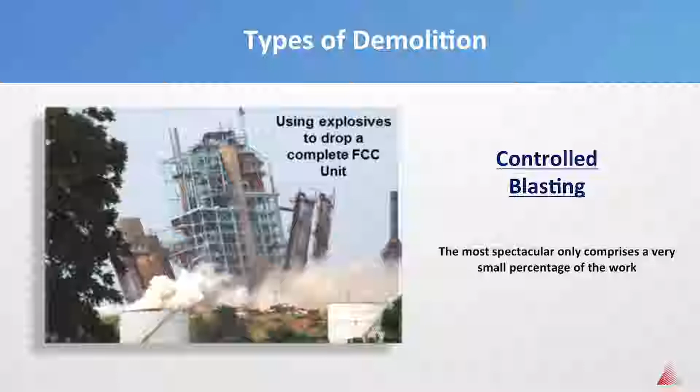Now this is one of the types of demolition: controlled blasting. It only comprises a small percentage of the actual type of demolition work, but it's also very, very safe to do if you do it correctly. Sometimes controlled blasting is the best route to go, but it only takes up a very small percentage of the actual content of demolition projects.

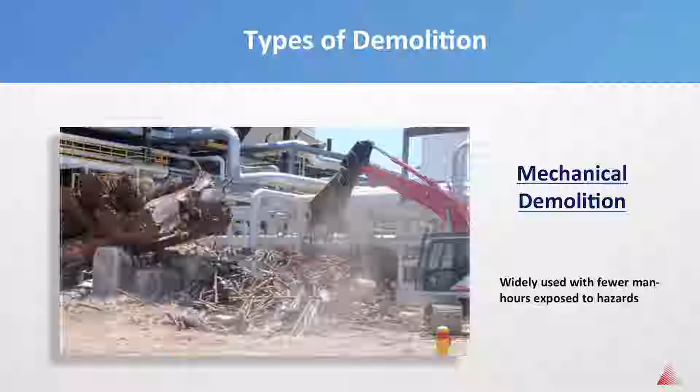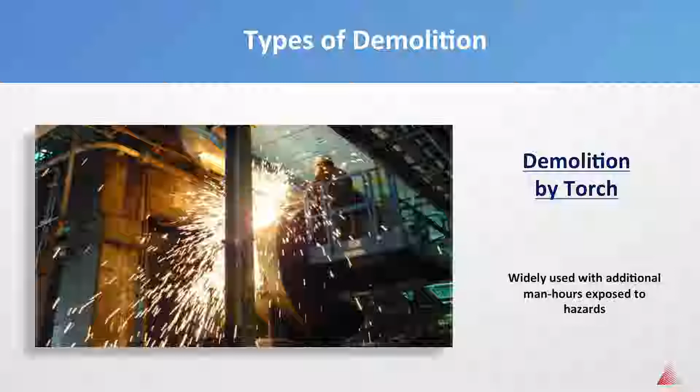Then you have mechanical demolition, which is widely used and has fewer man-hours exposed to the hazards. While shears and processors and things of that nature are the best things since pockets on a shirt, they can't replace the cutting torch as the staple of the demolition industry. Experienced demolition burners, or demolition techs, high burners—they call them by a multitude of different names—use terms like set cut, drop cut, fish mouth, hinge cuts. They use terms that can make a 3,000-ton structure come apart like an erector set. It takes a long time to train demolition burners, and a lot of experience, but they're worth their weight in gold when you have good ones.

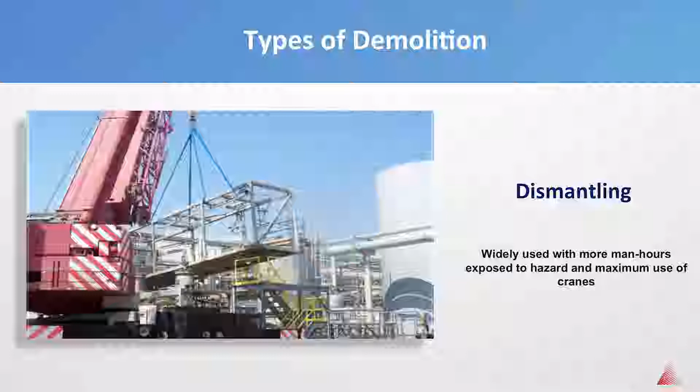Then you have dismantling, which is basically taking things apart with cranes. You either downsize them using saws, unbolt them, use cutting torches, or whatever it takes to break it apart into manageable sections that you can lift down with cranes. That's called dismantling. It has more man-hours exposed to the hazards, and a well-thought-out lift plan is extremely important. There's specific criteria you have to be concerned about in regards to making crane lifts on demolition projects, and we'll go over that a bit more later.

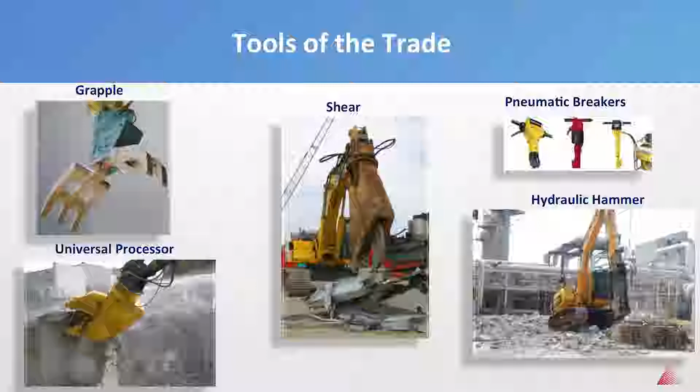One thing you notice is that on the cabs, there's a cage around the cab to protect the operators. That's really important. If anybody ever shows up with a piece of demolition equipment that does not have a cage to protect that operator, stop them—don't let them work. Because while these machines make taking apart a multi-thousand-ton structure look like short work with no problem whatsoever, all it takes is just one piece of concrete or steel the size of your fist to kill somebody.

Now you get people that talk about being scared to death to be shot at—a bullet's that big. But if you take a shear and cut into something, and a bolt the size of my hand pops out and flies 40 feet, that's going to do more damage than any bullet possibly could. So give these operators a wide berth.

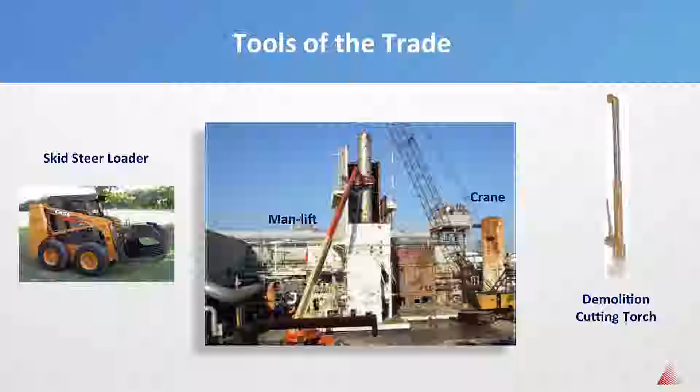Here's some of the other tools: a skid steer loader, a man lift, a crane, and a demolition cutting torch. Skid steers are the handiest things on demolition projects, and whenever I'm reviewing a demolition bid and the contractor doesn't have skid steer loaders on there, something's wrong with it. You need those—they have all kinds of attachments, and they're very versatile and handy to use on different projects.

Then there's a 3-foot cutting torch. If you have a contractor show up with a little 1-foot shop torch and start cutting, have pause and back off, and have them back off. The 3-foot torch or longer is an engineering control as well as a safety mechanism—number one, it allows the burner, the torch cutter, to stay out of the fumes.

We're all concerned about lead-based paint fumes. Any scrap guys or scrap dealers out here? Yeah, we got several out here. They'll be able to tell you that those fumes don't just have lead-based paint in them—they've got all the other metals that make up that steel.

They've got chrome, manganese, zinc, and everything else. So you need to make sure you keep your head out of the fumes and always wear a respirator, and have medical surveillance if you've got somebody using a torch.

Also, the 3-foot torches are longer. So many torches are 6 and 7 feet long. It allows you to keep away from the hazard in case something pops.

Demolition versus construction: if you can't measure it, then you can't manage it. You really need to make sure you can measure it, but make sure you're using an effective measurement tool.

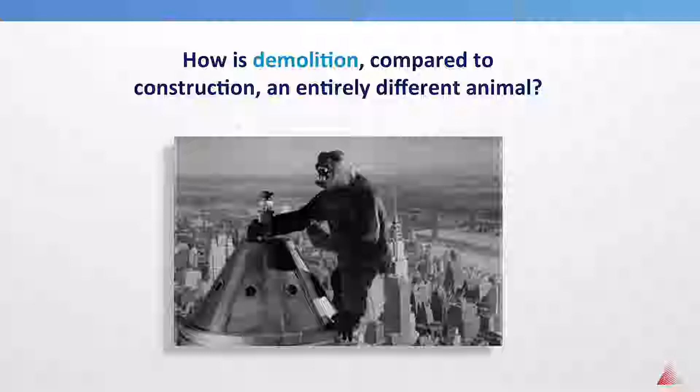So many owners and also many agencies use construction metrics to gauge demolition projects and contractors, and that doesn't necessarily work, because there's a major difference and it's an entirely different animal than construction.

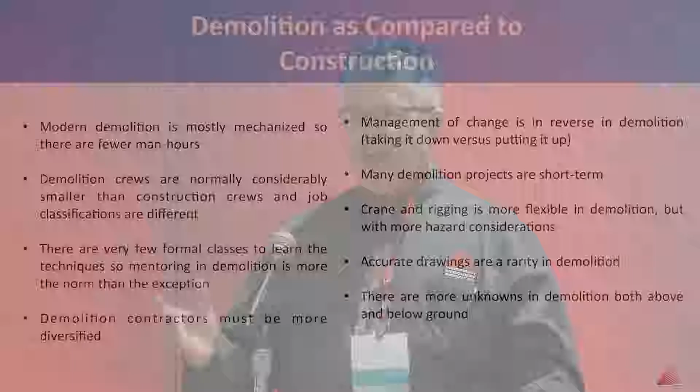Modern demolition crews are mostly mechanized, so there's fewer man-hours exposed to the hazards. Also, the demolition crews are smaller, and you're dealing with more hazards, because you don't have as many man-hours to dilute the total recordable incident rate and your experience modification rate and the other formulas you're concerned with. One recordable incident will blow you completely out of the water if you're being compared to construction standards.

So it's very important that you use an effective measurement tool when gauging the effectiveness, capabilities, and competence of a demolition contractor. There are few formal classes to learn demolition work, and mentoring becomes a way of life and more the norm than the exception.

Demolition contractors must be more diversified, and management of change takes on an entirely new meaning, because it's implemented in reverse in a skyline that changes by the hour.

Many demolition contracts and projects are short-term in duration. And accurate drawings are a rarity. I've got an example here where I'll show you that even when drawings are available, chances are they may not be accurate.

Craning and rigging is more flexible in demolition, but it has more hazardous considerations, and I'll go over that a little bit more in a minute. There are more unknowns in demolition, both above ground and below ground, especially in your older facilities.

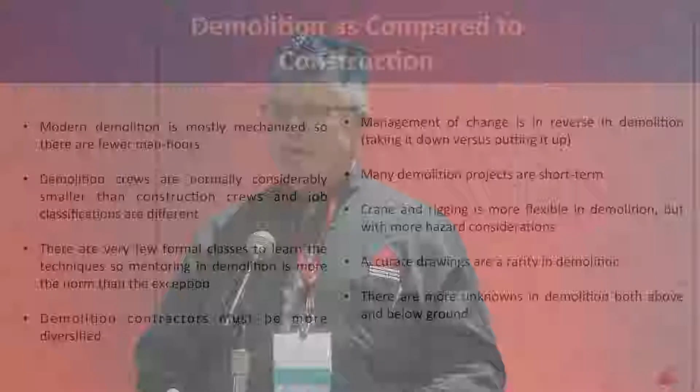Now here's some of the challenges on demolition projects: non-standard rigging. This particular lift right here, we had 2 engineers run weights on it. We were at 60% of the chart of the crane, so we knew we were okay. We went by the drawings, made the cut, tried coming up, and it would not come up. So we double-checked our weights, double-checked, made sure it was cut. It still would not come up.

An old-timer who had been there about 30 or 40 years came up and said about 20 years ago, we opened that column up and installed a water tank on the inside, and that water tank may still be there. He said, I don't know if it's on your drawings or not. So we cut a little coupon in the side, looked inside, and sure enough, there's a water tank. So we went ahead and cut an entire section out, drained the water, and removed that tank so we could complete the lift.

Now, a lot of times on demolition crane lifts, once you have it, it's yours. In this particular case, we felt very, very comfortable that we weren't going to have an incident, because we could set the load back down, but we felt very comfortable with the weights.

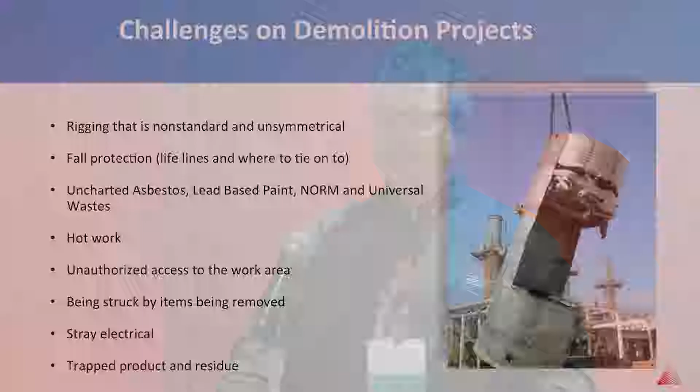Other challenges: fall protection. You're taking everything down, so what are you going to tie off to? That's a good question. Uncharted asbestos, lead-based paint, universal waste. You need to have a competent person on site capable of recognizing the potential for hazardous materials that was missed in the survey.

If you're dealing with asbestos, the requirement to have a competent person on site in accordance with certain standards is required. Hot work: know what to look out for, so you don't blow yourself or the plant up. That's really important. Also, unauthorized access to the work area.

So have barricades, both hard and soft, around the work area, as well as have sign-in and sign-out sheets.

One of the things mentioned in my bio is that I'm a professional safety source approved by the Texas Workers' Compensation Commission in the SIC code of wrecking and demolition. I've had to investigate a lot of accidents, and not all of them were on any of my jobs.

But the worst accident I've ever had on one of my jobs involved a broken back. We had an area barricaded off, and everybody broke for lunch. One of the workers went inside the barricaded area and decided to take a nap. Everybody came back to work, and they didn't know he was in there. This happened in 1986, and the gentleman's name was Pedro Molinas. Somebody dropped a beam across his back, and he's a paraplegic now. He has been for decades.

So things like that, you need to make sure that you have the areas barricaded off and have sign-in and sign-out sheets, and keep control of the work site. One of the things we should have done on that job is make sure we swept the area and made sure there wasn't anybody in there prior to starting work again.

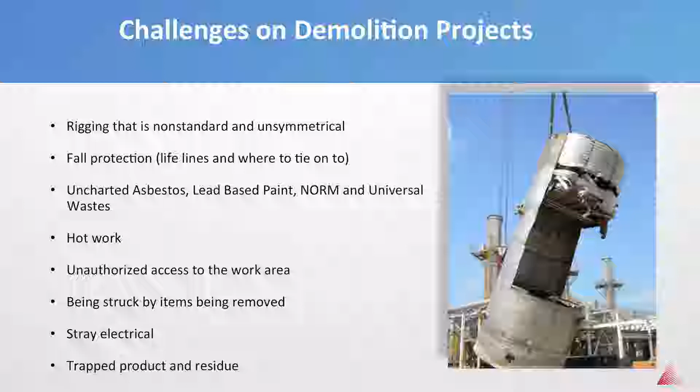Stray electrical - I'll go over it in another slide in just a couple seconds - but one of the things is that the structure may have all the electricity locked out and tagged out, but somebody might have run a stray line off the grid 30 years ago. So anytime you go into a demolition project, treat all electrical as if it's alive until you verify otherwise.

Structural fatigue of walkways and ladders - will they sustain your own weight? I know there was a major accident that killed some people over in the UK involving workers walking on a catwalk, and the catwalk fell. So don't assume that a ladder or a walkway will sustain your weight. Are they safe to tie off to?

If you're up there working on a catwalk, make sure it's safe to tie off to. Will it sustain itself during a lift? One of the things contractors do when making lifts is cut shackle holes in the side of the columns and hook into those. Make sure those shackle holes and the metal in those columns are capable of sustaining themselves when you make that lift, because it's not new construction. But that is a proven method - it's a good way to actually make the lifts, cutting the shackle holes.

Poor training and mentoring of workers - it's important that even certified workers are mentored by experienced demolition personnel. You can have a certified crane operator, NCCCO certified, with absolutely no demolition experience. So just requiring NCCCO certification in cranes doesn't mean they know the nuances and hazards associated with demolition. Make sure you provide a mentoring program to that effect.

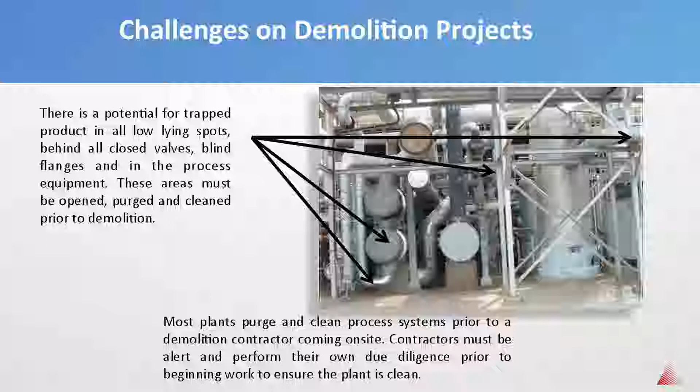Now, another accident, and I'll share a few accidents with you that I've had to investigate. To tell you the truth, I'd much rather prevent an accident than investigate one, just for obvious reasons. But in this particular accident, it involved an oil refinery in Texas. A demolition contractor was taking down a tower that had a big pipe that came down. It was like 100 foot tall.

Workers had been cutting on that pipe all day long without any kind of problems. They were making their very last cut before the end of the day, and there was a valve. That valve was closed. The workers cut on the other side of the valve. Management had changed, things changed. They didn't implement any type of change procedure, and they didn't recognize the fact that hey, that closed valve might mean something. There was trapped product on the other side of the valve. The pipe exploded, killed the torch cutter automatically, and also it just about blew the head off of the man lift, and it seriously injured the other worker. So make sure you verify that something is dead and does not have any type of product or any type of explosive vapors or explosive product in it prior to cutting on it.

Again, stray electrical - always make sure that you verify and verify and verify again. This probably causes more incidents and accidents on demolition projects than fall protection, than people that fall. So this is something you need to verify, that the power is locked out and tagged out, and that somebody did not run an independent line off the grid 30 years ago.

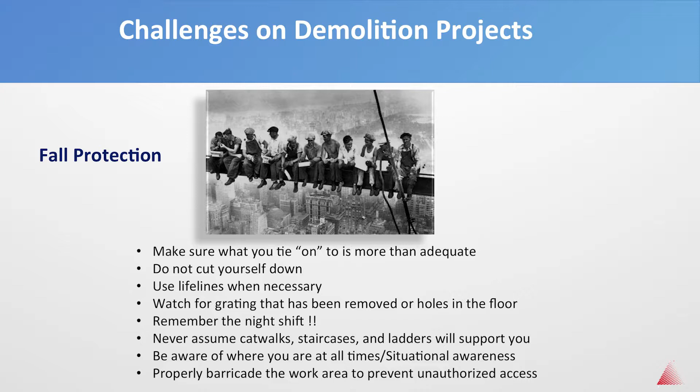Be aware of where you're at all times, situational awareness, and always have an escape route. Here in this room, if the room catches fire, we've got an exit there, and an exit there. If we have an active shooter, hey, we've got an escape route. Everybody start throwing things, or whatever your training is. Anybody on demolition projects, especially on older plants, needs to have an escape route in everything they're doing.

Another accident I had to investigate was about 10 years ago. An excavator operator was in the process of pulling over a structure that weighed 300 tons. He had an excavator with a cable tied off to the structure, and two cutters up inside the structure weakening it, making it ready to pull over. The operator thought the cutters were taking too much time to finish their cuts, so he got out of the excavator and walked up into the structure. When he did, the structure prematurely collapsed, fell on top of him, and crushed him. The two cutters and the foreman had escape routes, so they weren't hurt.

Everything should go as planned, and like Fred said, you design a plan and then you work that plan. But on demolition projects, you've got to really be concerned with the fact that good things on demolition projects, after a while, look like paint drying. But bad things, when they happen, are usually catastrophic, and usually something that's going to make the newspapers. So make sure you do manage change, and make sure you use lessons learned to make sure nobody gets hurt.

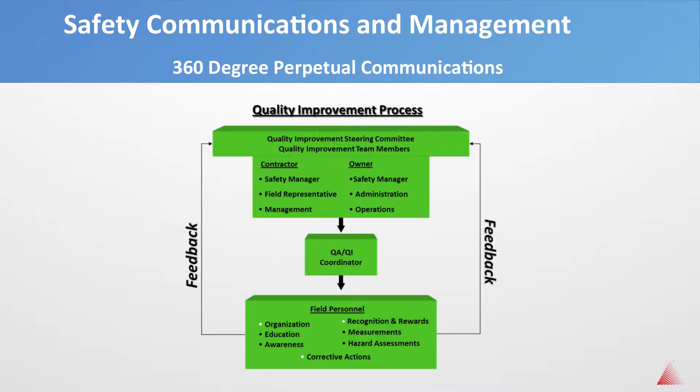What to look for in a quality demolition company. Choosing the right demolition company is very, very important. A lot of this stuff, I think Fred may have already gone over some of it, but I'm going to touch on it from a little bit different flavor, I think.

What do you look for in a top-notch demolition company? One is a great safety record. Make sure that when you look at their safety stats, you verify those stats. A lot of people use IS Networld, PEC reporting, and other companies that pre-qualify contractors, but it's junk in, junk out when it comes to safety. So something as simple as running a web search on a particular contractor before you hire them can help find out if there's anything that didn't show up that should have shown up on their safety stats.

Employee retention: how long have key employees been with the project? Also, do they understand the HSE program, or is it just a fat book on the shelf drawing dust? Financial stability, bonding capacity, experience on similar projects in similar industries, and experience to effectively use investment recovery to help offset costs.

Now, a lot of companies have a playbook. They let the demolition contractor tell them how much value is out there, what it's going to cost to remove it, and what your net cost is going to be. I've got another slide on this I'll go over in just a second, but that equates to asking somebody to hold your wallet without knowing how much money you had in it to begin with. You really need to have a good handle on the value of what you have on your demolition project prior to going out for bids. If you don't, then you're basically at the mercy of the contractors.

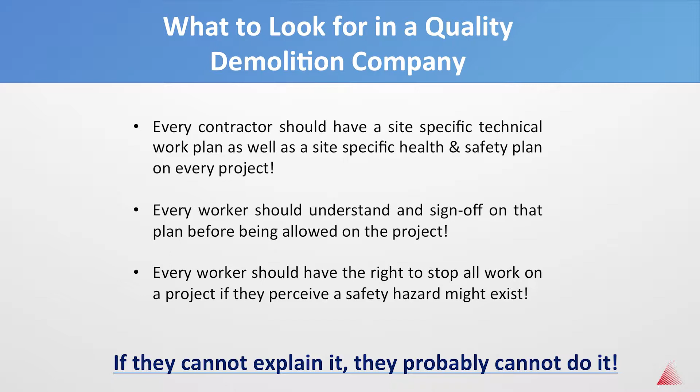Every worker should have the right to stop work in the event a perceived safety hazard exists. And remember, it's all about the people. You could have a great demolition company that's great on paper, but they could have a sorry crew. You could have a mediocre demolition company that has a great crew. So learn to evaluate the entire package, not just the contractor itself, but the crew they're going to put on your project.

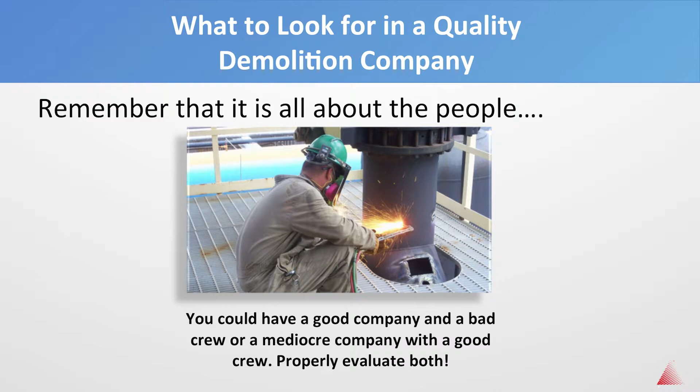A site-specific plan should be concise and linked and tied into a master plan. Now, the corporate health and safety manual is great, but there's no way you're going to implement a 600-page plan on a demolition project. So you need to be concise and be more concerned about getting the message across. You can reference it back to the health and safety manual, but you need to be concise. A 30 to 40-page plan should be sufficient in making sure that you get the point across to the workers actually doing the work. Be in addition to the corporate safety manual, and be flexible.

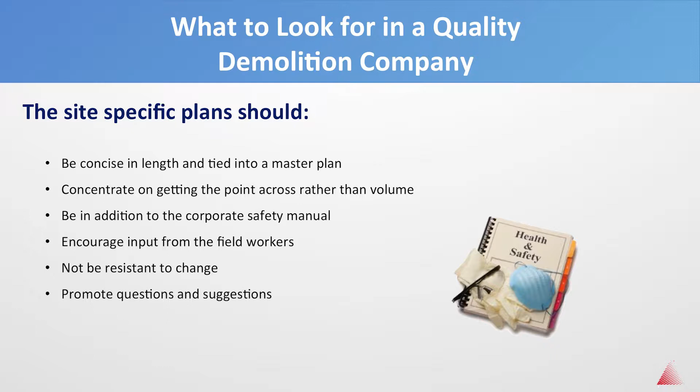One of the things I see a lot of folks do is put together the plan, but then they just bring the crew in and don't get input from them. So be flexible and promote input from the crews, and don't make that plan resistant to change.

The plan should be relevant and effective, including behavioral-based safety observation and stop work components. It should educate every worker on the entire scope of the project, not just their small part, as I mentioned a while ago. Explain the hazards and mitigation measures prior to the worker being exposed to the hazards. That's important.

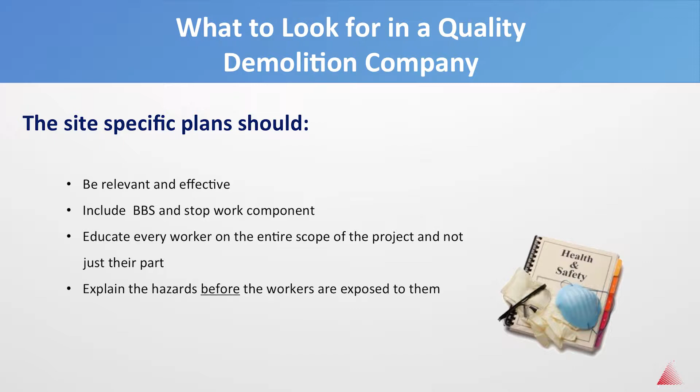So these are some of the elements of a technical work plan, and a resource-loaded schedule, which Fred talked about a while ago. There are ways that you can evaluate a schedule and basically help prevent change orders or recognize potential change orders. Key contact personnel, including after-hour contact information, average crew size, hospital, landfill, and scrapyard to be utilized, and waste management.

Fred's already talked about waste management, and also third-party waste stewardship standards. Out there on the job site, everybody's wearing respirators, they've got their PPE, they've got protocol they're following, they've got a written plan. You need to make sure that when you send that material off-site to a landfill or a recycling facility, that they're employing that same degree of quality assurance that you have on that job site. Because, regardless of what your contract says, if you send a piece of pipe that has two blind flanges and is full of product and somebody cuts into it, they're going to come back to you. It's going to come back to you.

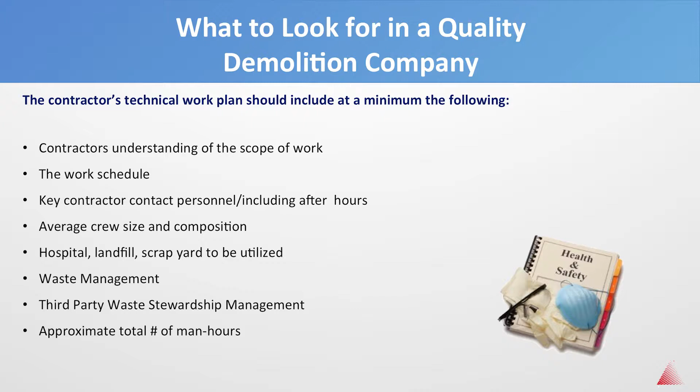So make sure that third-party waste stewardship audits are done prior to sending materials out to landfills or scrapyards. Approximate total number of man-hours per area, and here's some other things: major equipment and quantity to be used, subcontractors to be used, and community and stakeholder awareness programs. I'll touch on that very briefly.

On the big fluid catalytic cracking unit where I showed you it being dropped by controlled explosives, that was taking down an entire oil refinery. There was community living all around that oil refinery. So basically what we had to do—and they were upset, number one, because the oil refinery was coming down, and number two, they were having all kinds of big trucks coming up and down the road.

So we had to come up with a community engagement plan, basically where we let the community know what was going on. We showed them videos—here's what to expect. We've got these big things that look like dinosaurs that are going to be knocking these structures over. And we let them know what to expect.

We also gave them contact information saying, look, contact this person if you have a question or a concern. That way they don't go to the authorities or the newspapers, they'll come to that one person.

But one of the best things we did was come up with a one-page newsletter each and every week saying here's what to expect this coming week. So a community engagement plan, and also stakeholder engagement plans.

You have the owners. Make sure as contractors that you explain to the owners what the game plan is and stick to that plan. If you vary from that plan, come back to them and let them know and get approval first. Most of them will do that anyway.

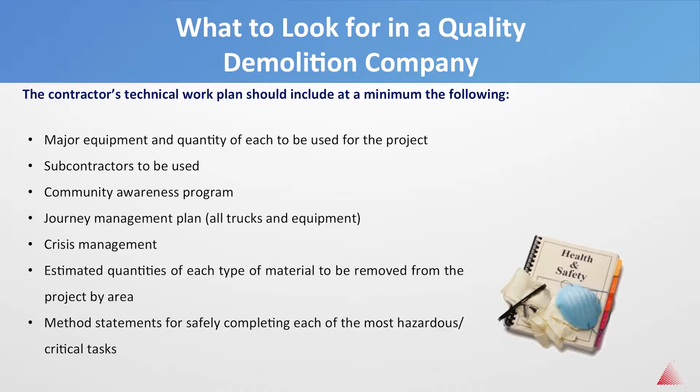This is one thing most site-specific plans lack - method statements. Whenever you take down a unit, one of the first things you need to do is decide which tasks are most hazardous, then come up with a method statement that's more detailed on how you plan to address and mitigate those hazards and take that item down safely. Method statements are not very common, and I think it's very important to implement them in the site-specific plan.

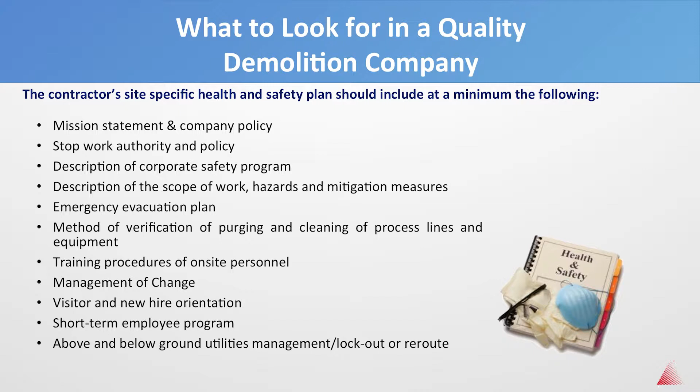So again, it's more of the same - you'll get a copy of this. I'm not going to read the entire slide, but one thing I will mention is make sure the contractors put enough effort in, not just a bunch of cut and paste. Make sure they put enough effort into designing a site-specific technical work plan and a site-specific health and safety plan. These are some of the elements of a health and safety plan, some of the chapters you might want to see in your project. And here are some other ones - I'll give you a chance to read them, in case I have any specific comments to make.

Okay, there'll be one more.

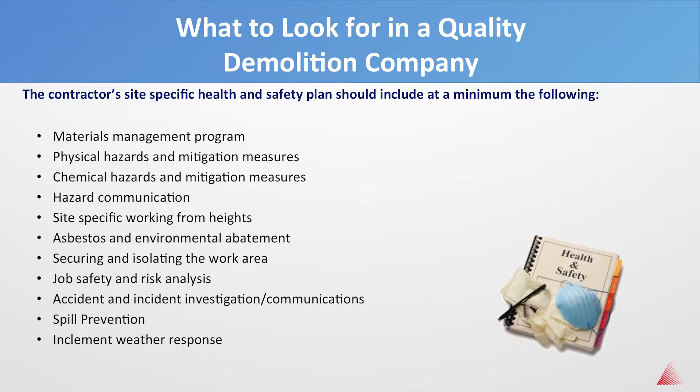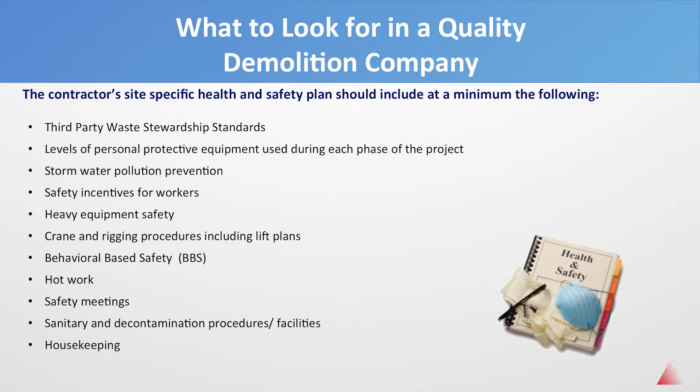Now on this one, one thing I'd like to mention is third-party waste stewardship standards. You might find redundant chapters between the site-specific health and safety plan and the technical work plan. One is meant to be technical, and the other is meant to reference and address health and safety concerns. So it may be the same chapter, same title, but a little bit different.

But stormwater pollution prevention plans - if your site is over 5 acres, I believe that's correct. Is that right, Fred? Is it over 5 acres? 1 acre? Okay, if your site's over 1 acre, you need to have a stormwater pollution prevention plan in place.

Also, one thing not listed here is medical surveillance on employees. On lead-based paint, for instance, if a worker has high blood lead levels before coming onto your site and they're doing something exposing them to lead-based paint, they could exceed that trigger so the body isn't getting rid of the lead, which could cause serious health concerns.

But also, the fact is, you have to be concerned that if they show up with high blood lead levels after coming onto your job site, then basically they're yours - it's up to you to prove they did not have that high blood lead level prior to coming on site. That's why it's very good practice to make sure your demolition contractor provides pre-project and post-project blood lead levels, so you know that hazard did not come from you. Because in this industry, it's just as important to prove what you did as what you did not do.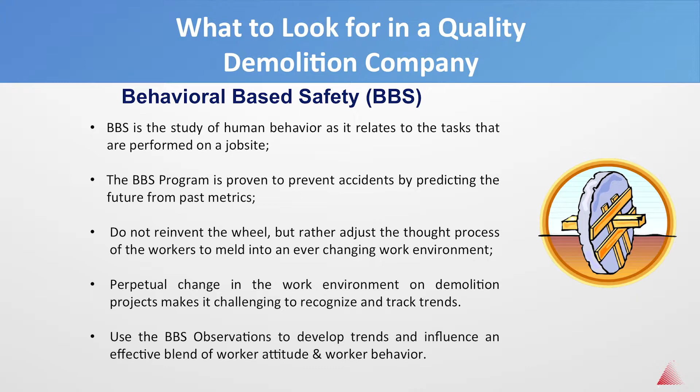Requiring workers to submit and adhere to BBS observations to develop a positive trend that positively influences an effective blend of worker attitude and behavior is a great practice. A good BBS program is also proven to prevent accidents by predicting the future from metrics from the past, and I can give you all kinds of examples of that, but I won't do it right now.

Also, most demolition projects are short in duration. So the short duration combined with a skyline that changes by the hour puts management of change into an entirely different dimension.

This presentation would not be complete without addressing the impact that asset recovery, or investment recovery, has on the bottom line. Effective investment recovery is essential to a successful demolition project.

So by looking at all this different type of material on your projects - if you've got Hastelloy, and your cost is $300 a ton to do the work, and you're getting $200 a ton credit for the scrap steel, then basically your cost is going to be $100 a ton. Now if you've got a $300 a ton cost, and you've got copper at $5,000 a ton, then that's $4,700 a ton that can be applied against non-revenue producing tasks.

So look at the job as a sum of its components rather than just scrap overall. Also, look at the value of the materials as money, because that's what it is, and you need to spend it wisely.

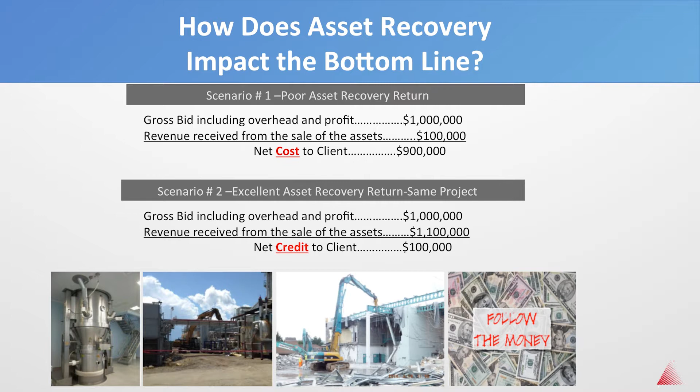I can't say that's going to happen on every single project, or even a lot of projects, because you do have non-revenue producing tasks that are going to be costs - there are ways to offset them, and we can discuss that later if you want. But those costs have to be incurred. You can be creative, through value engineering, to make sure the salvage credit on a project is maximized, to offset the cost, so you come up with the least amount of money out of pocket.

Bid comparison: as owners and contractors, there's a mutual benefit to submitting bids in a manner that apples can be compared to apples. I hope you folks can see this, because it's a very important slide regarding evaluating proposals and bids - probably the most important slide I've ever put on the screen.

Sometimes the apparent low bid is not the actual low bid. If you look at the two contractors here - and backing up a little, I've had a lot of different contractors come to me and tell me that their bids weren't properly evaluated, that the company wasn't comparing apples to apples, and they didn't get the job. Sometimes it's sour grapes, sometimes it's a valid complaint.

I've had owners come up to me and say, yes, we selected the low bid and we ended up paying $5 million in change orders. So that happens. Properly having bids submitted so you can compare apples to apples helps ensure you're choosing the right contractor, and that the apparent low bid is the actual low bid. In this particular case, bidder contractor number 2 appears to be the low bid.

Before they lose $5 million, they're going to come back to you for change orders if they made a mistake. Now, you can't really see it, and I apologize for that, but you will see it when you download it. But here are some examples.

Contractor number 1 allowed for removing 15,000 tons of metal. Contractor number 2 only allowed for removing 5,000 tons. Contractor number 1 allowed for $3 million in hazmat abatement, contractor number 2 only allowed $1 million. Contractor number 1 allowed for removal of 150,000 linear feet of underground piping, while contractor number 2 allowed for removal of 400,000 linear feet. Contractor number 1 had 792 days, while contractor number 2 had 132 days.

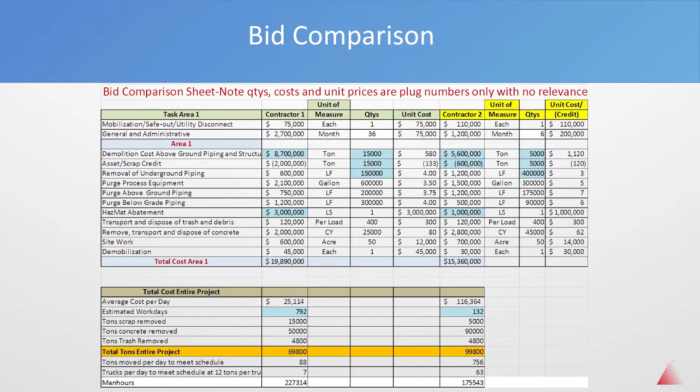Having a third, fourth, fifth, or sixth bidder helps fine-tune your bid bracket, but you don't want too many, because then you're really just looking for somebody to make a mistake. It also helps you get a better handle on the cost, but you still need to balance those bids and make sure everybody's had a chance to review their numbers, so you feel comfortable that they can do the job for the amount of money they said they could do it for.

So now, we've only got about 15 minutes, so we're going to take about a 5-minute breakout session. Get everybody talking at the tables. If you're sitting by yourself, please join a table with somebody else. Let's talk about what's worked for you, best practices, and what has not worked for you on demolition projects. Let's get back together in about 5 or 10 minutes.

We spoke at our table about some best practices. Number one was we wanted to allow enough time to get through everything, have a detailed schedule, and make sure we follow it. A lot of times, by the time you award a contractor a project and it gets going, the schedule is already compromised by 4 months, and you have 2 months to do 6 months worth of work.

We talked about potential turnkey solutions, whether you have a contractor do everything, the asbestos abatement, decommissioning, or do you separate the tasks out on the job?

One of the best practices and key insights we discussed was having everybody together for a communication meeting in the morning or a JHA, with the field technicians, operators, managers, and project executive all there to contribute to developing it. One of the worst practices we've seen is when contractors go on site and don't know who's handling overall site safety, whether it's an active site or an orphan site, and there's no clarity on site safety policies, or what's more stringent, theirs or the site's overall safety procedures.